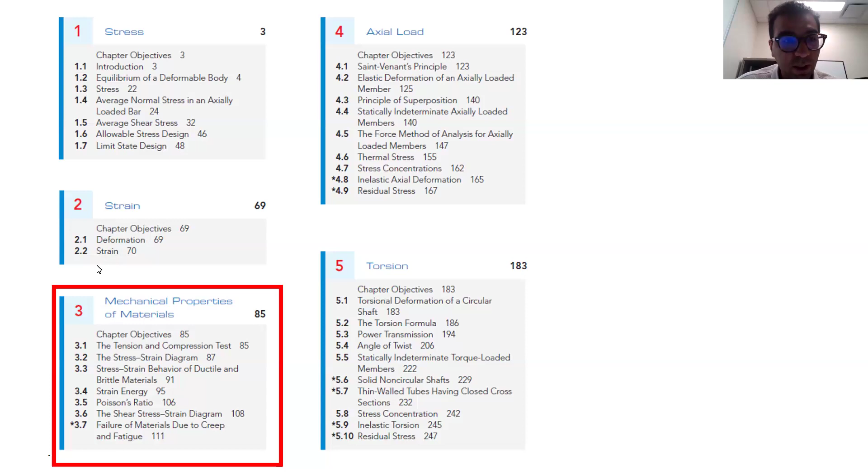So, well, we mentioned that the first three chapters are our fundamentals. In our fundamentals, we learned about stress and also strain. And now in chapter 3, we want to

get more knowledge about the property and the strength of materials, right? So in chapter 1, we mentioned that an object is under a stress. In chapter 2, we mentioned that this object will get deformation with the concept of strain. And in chapter 3, we'll talk about how strong this object is in order to tolerate this stress.

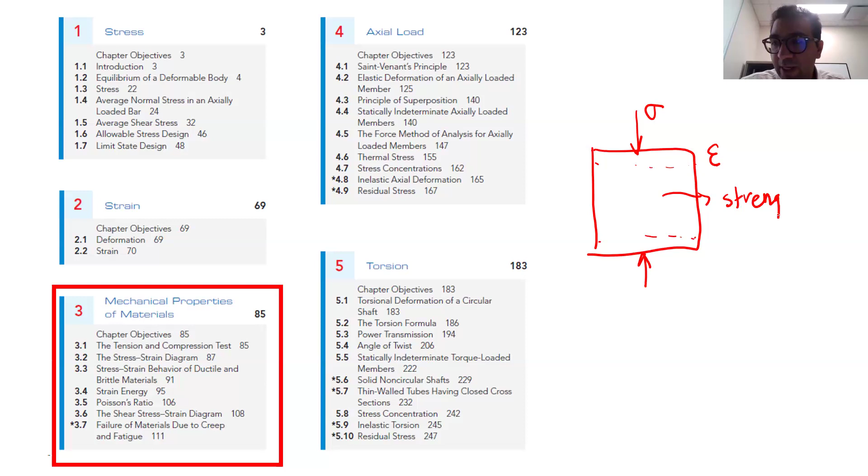If the object is stronger, the strain is lower. If the object is weaker, the strain is higher. So there is a correlation between the strength of the material and the amount that material experiences deformation once you apply a stress on it. So

the property of strength - in engineering we always want to quantify characteristics, right? We want to have measurements, we want to put values on it. I'm saying this object number 1 is stronger than number 2 - how much? What's the value of that strength? How do we characterize that strength?

That's the ultimate goal of an engineer - characterization of the real world. However, if we don't do that, we already know object 1 is stronger than 2. But that's just a qualification. In modern science, in modern engineering, we want to characterize that.

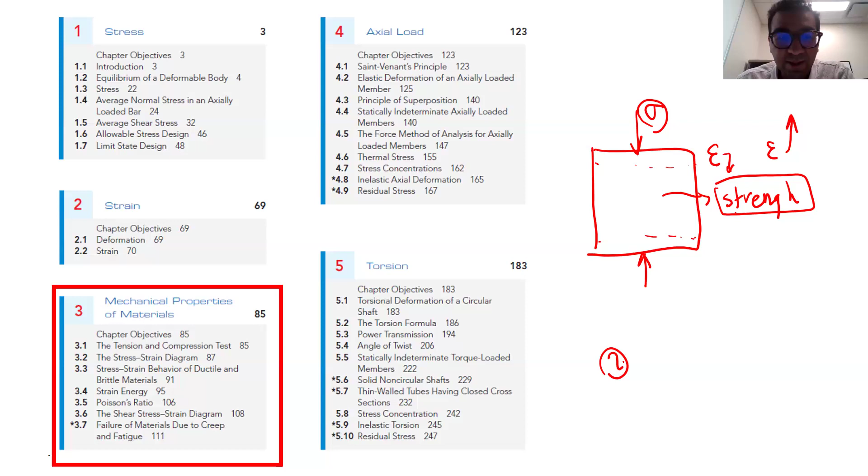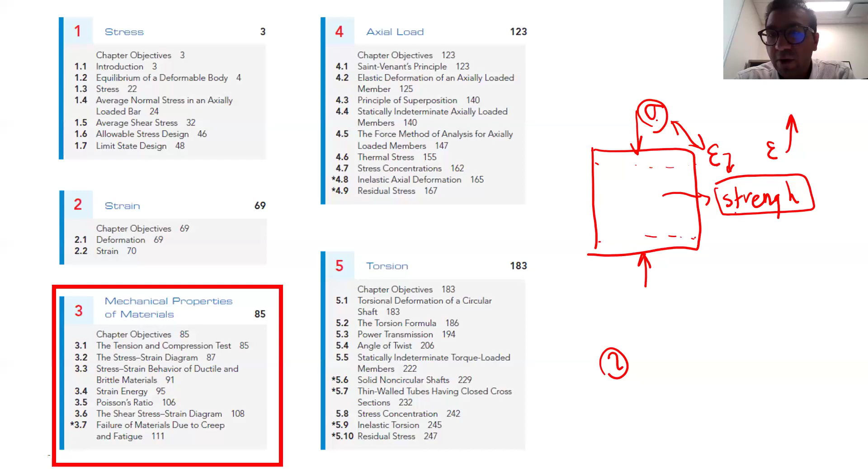So for characterization, we see that there is actually a correlation between stress and strain, and with that correlation we can characterize the strength of materials. So that being said - if material object 1 is stronger, with the same amount of stress you have lower strain. If it's weaker, with the same amount of stress you have higher strain.

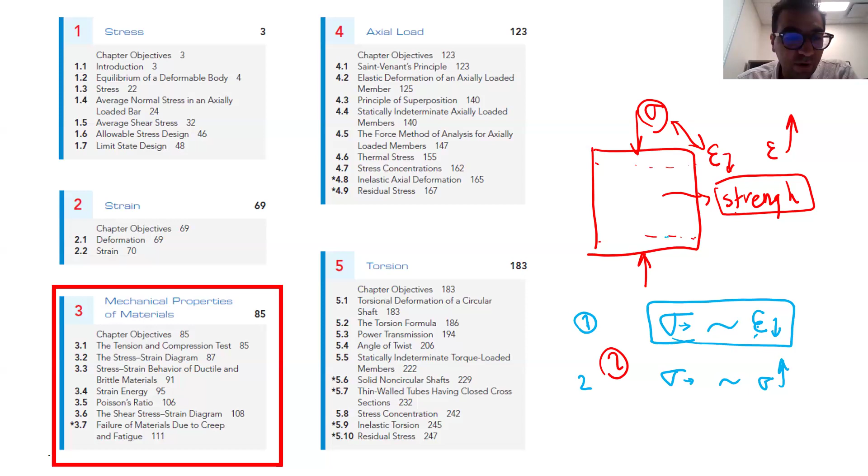So there is a correlation. You can develop a correlation between stress and strain to characterize the strength of your materials. That's what we're going to discuss here in chapter 3.

This is an outline for this chapter. The first topic we'll talk about is material characteristics, or how we are actually characterizing different materials. We'll start with steel, as it's a little bit more straightforward, and we develop our foundation of how we calculate and measure material characteristics for steel.

Then we're going to expand it to other materials. In this section I'll talk about aluminum, concrete, wood, or different types of materials. It's the same procedure, but obviously these are different materials, so their mechanics and strength will be different. But we'll start with steel, as it's more general and a better example to start with.

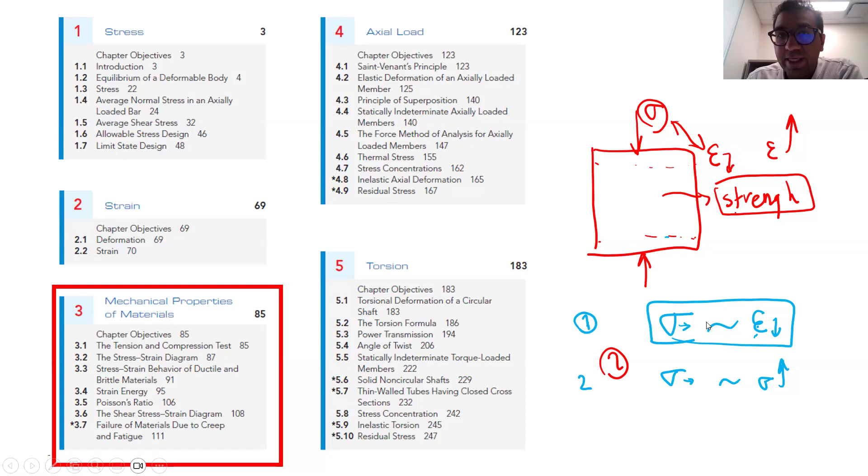And then we'll talk about a stress strain diagram. So I mentioned that we can develop the strength of the material by developing a correlation between stress and strain - that's what's called a stress strain diagram. From a stress strain diagram we can learn a lot about the properties of material, as we are going to discuss. So these two will be fundamentals.

Again, for a stress strain diagram, firstly we'll talk about steel, and the diagrams obviously will be different for different materials. Then there are some specific topics about the behavior that material shows. We'll talk about a ratio called Poisson's ratio, and we'll discuss that as well. And then the shear stress strain diagram. So here is also the point.

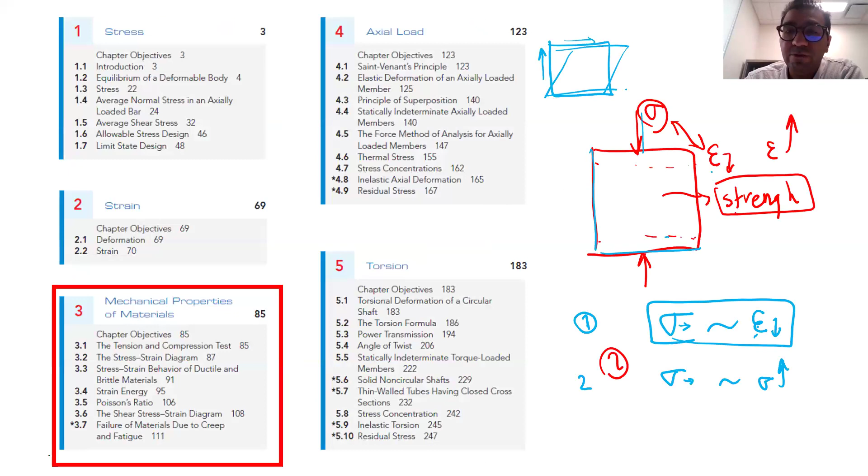Same as the material has axial strength by applying axial stress and getting axial strain, the material also has shear strength, because once you're applying these slidings, the material tends to distort. So is it going to be easy to distort your material or not? How strong is that material against distortion? That is defined by another correlation, now between shear stress and shear strain, developed by the shear stress and shear strain diagram.

So let's start from the basics and fundamentals, the material characteristics, and we'll start with steel. As I mentioned, the goal here is to characterize the properties, to measure the exact value of strength of a specific property. In our example, a steel property, a steel material.

So obviously we have different types of steels. Different manufacturers produce different types of steels. There are different chemicals associated inside a steel frame or a steel object. Let's jump these slides and I can show it here.

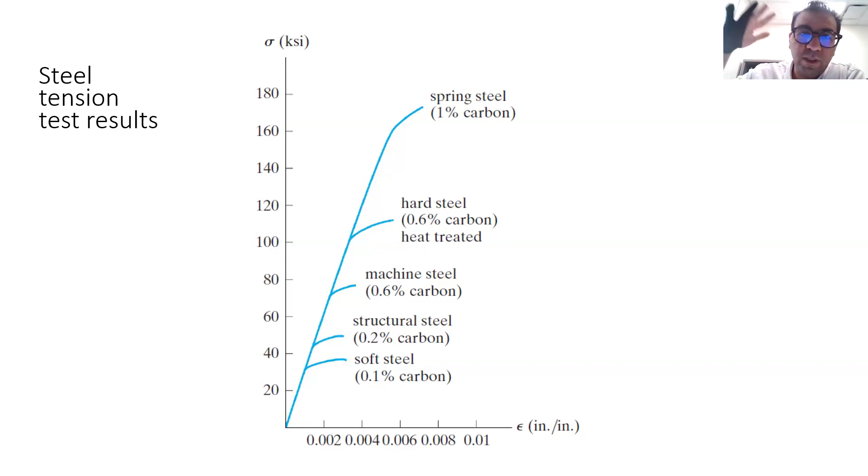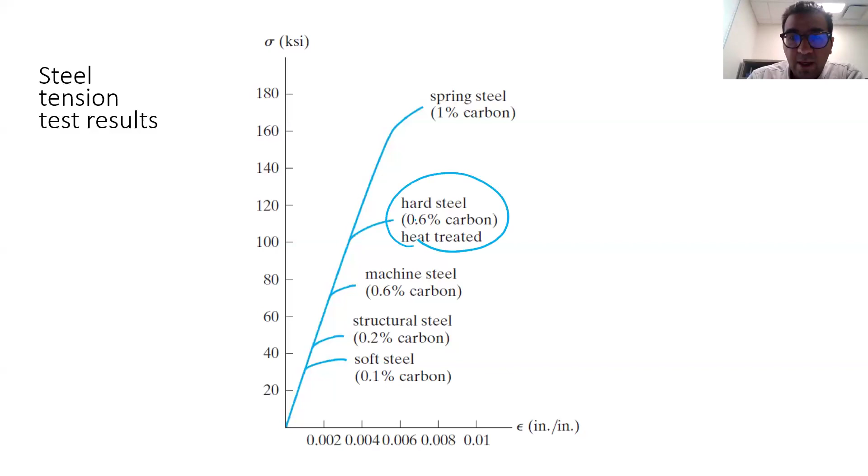We just see it at a macroscopic level, a wider view to your material. So this is good for us, we don't get to the chemistry of the materials. We just know that, okay, this is a specific steel, the manufacturer produces this steel, hard steel.

And the manufacturers give that steel in a shape of beams, for instance, or columns, and you're going to use that in your building, beams or columns in your building. So once you're using that, you want to know the exact properties of that, the exact strength of that. In order for that, we need to do some laboratory experiments, some laboratory tests on our steel.

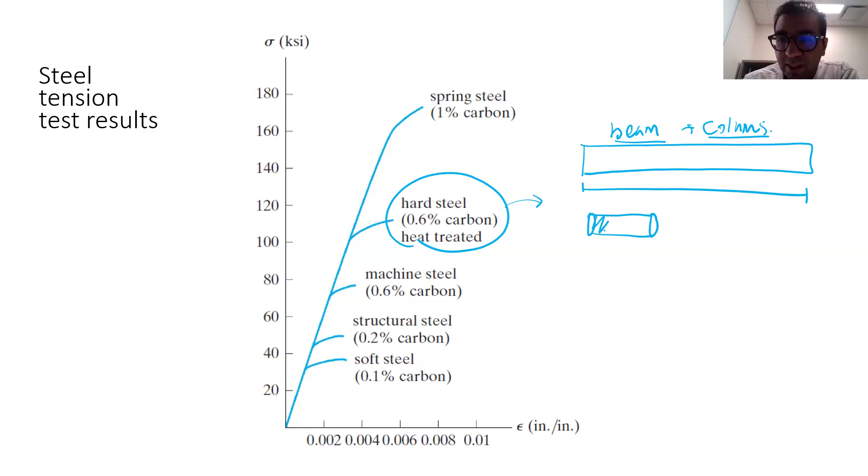So for doing the laboratory test, obviously you don't want to bring a 30-foot beam to the laboratory, you don't have room for that. So you get a small sample of that steel, and that sample is in the shape of a bar, and they usually look like this. So it's in the shape of a bar.

Another note, we engineers love to standardize things. So this is a standardized sample that you can get from a manufacturer, and you can bring it to a mechanics of strength laboratory and test its strength. So how do we test it?

We put the sample inside a machine. The machine is called a tension and compression machine. In this machine, there are hydraulic jacks, and by these hydraulic jacks, you apply normal loads to your bar. You can apply either tensile loads or compressive loads. And then the machine also measures the amount of deformation that the sample gets during that load application. Therefore, we would be able to calculate the stress and deformation in terms of strain. Keep in mind, this type of loading is the normal or axial loading.

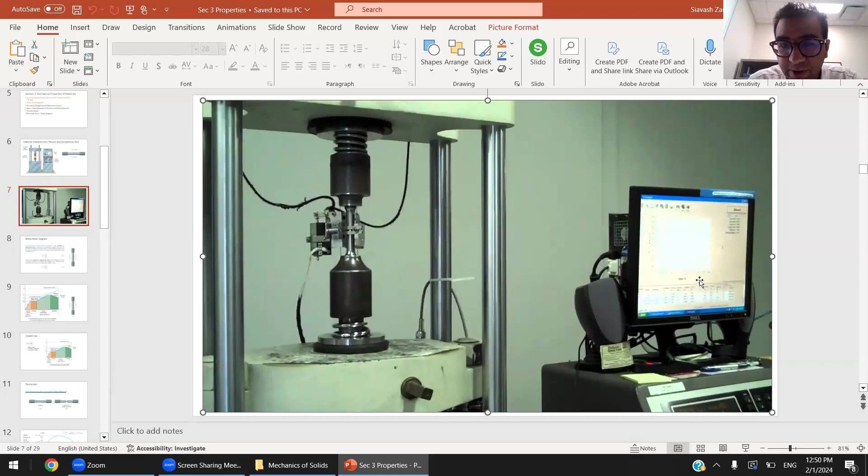So I have a video here. I think this is a video, right? No, this is a photo, the video is here, it's a YouTube video. So this is the actual device, you see that the sample is placed here, and the device is connected to a computer, so these measurements can be written.

One point here is that for the stress we are applying - again this is technical terminology, we put the force but that gets to a stress - the stress that we are applying to this bar, we start from zero and we increase it incrementally. So slowly we increase that stress, and therefore your material slowly starts to increase its length and it starts to have strain in it.

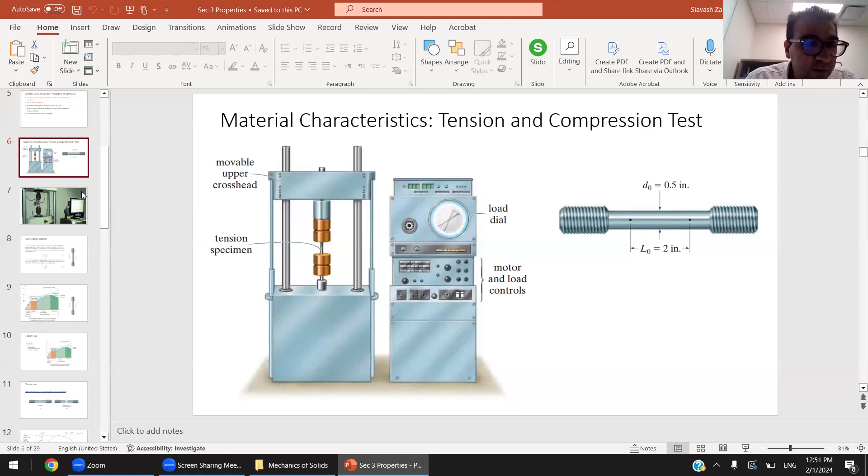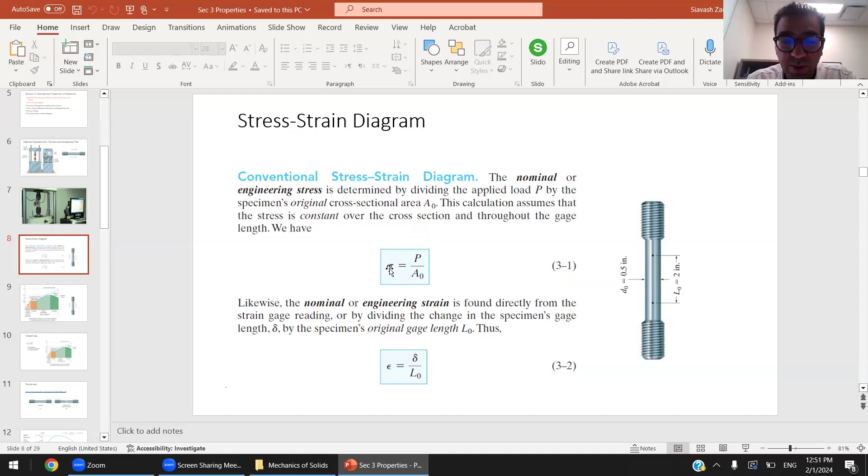So at any stage of the test, we can calculate the stress and the strain of that material. Based on the discussions we learned in section 1, the stress of that material is the force that the device applies to your element divided by the initial cross-sectional area of your element. So that

Diameter of the element is 0.5 inch. Therefore, initial cross-sectional area is pi times 0.5 squared divided by 4. So the A naught is constant. P again starts from zero and then gradually increases. So P gradually increases, that means your sigma gradually increases.

So strain is equal to deformation divided by the initial length. For initial length, we are evaluating our actual element from here to here. We are studying, having laser focus on this segment, and we measure the distance from these two points. So the initial length of your element, this is our element actually, these are the connecting points. The initial length of element is 2 inches. And we consider that initial length to be the same throughout the test. The deformation increases, starting from 0 deformation and increasing incrementally.

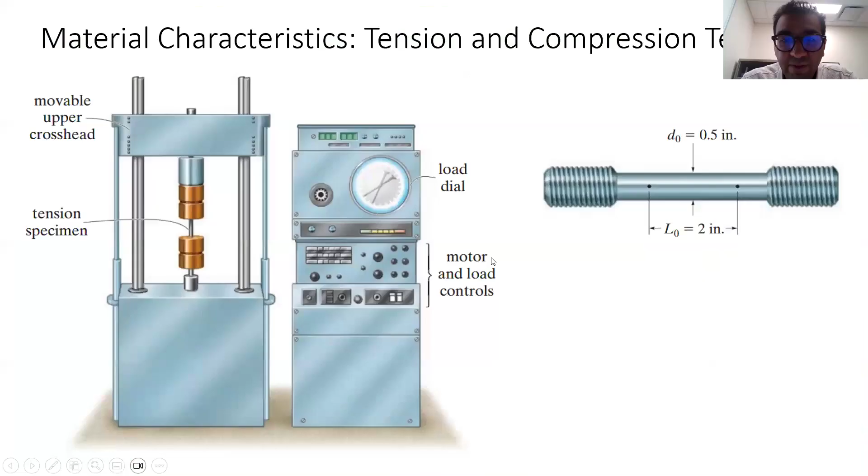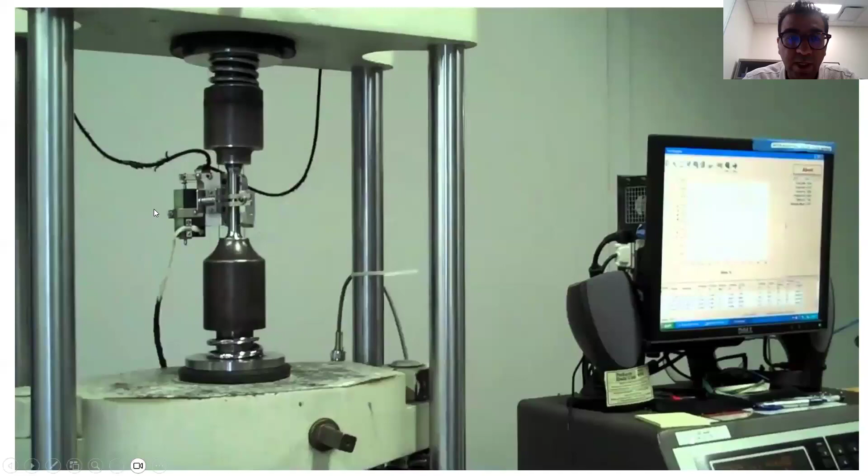evaluating its characteristics. So at the beginning of my lecture, I mentioned that the correlation between stress and strain shows the characteristics and the properties and strength of your material. And here is that correlation that I was talking about. You get a diagram, that diagram shows the correlation between stress and strain, and that correlation or that diagram shows the characteristics and characterizes the values and properties of that steel.

Okay, so I'm going to pause my lecture here. We learned that this is going to be a diagram obtained from the tensile test. Now we are in the tensile test, right? We didn't talk about compression yet, so this is a tensile test. We get a diagram, and in my next lecture, I want to mention why the diagram looks like this, what this diagram tells about the steel, what's the story of this diagram, and how we characterize and what are the properties of this steel that we can read from the diagram.

So the diagram has lots of details, and it shows the different behavior of steel during the loading. Once the loading is small, the behavior of steel is different. Once the loading gets higher, the behavior also changes. The last point here is once the steel breaks, right? Fracture. So the steel just gets disconnected here, failure of the steel. Once the steel fails, your diagram stops.

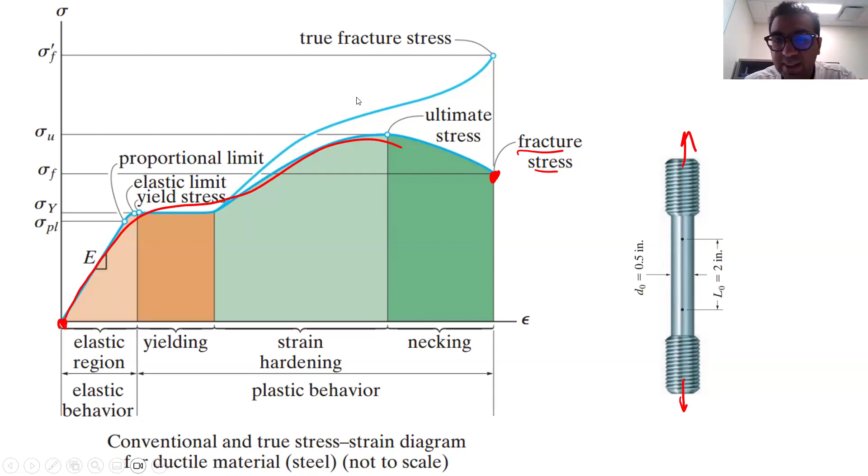We get here, so we start from 0 strain to here. That's the failure of our element. From this path, we see a lot of different behaviors, and we want to study these behaviors. I think they are very interesting, and we are going to discuss it in the next lecture.